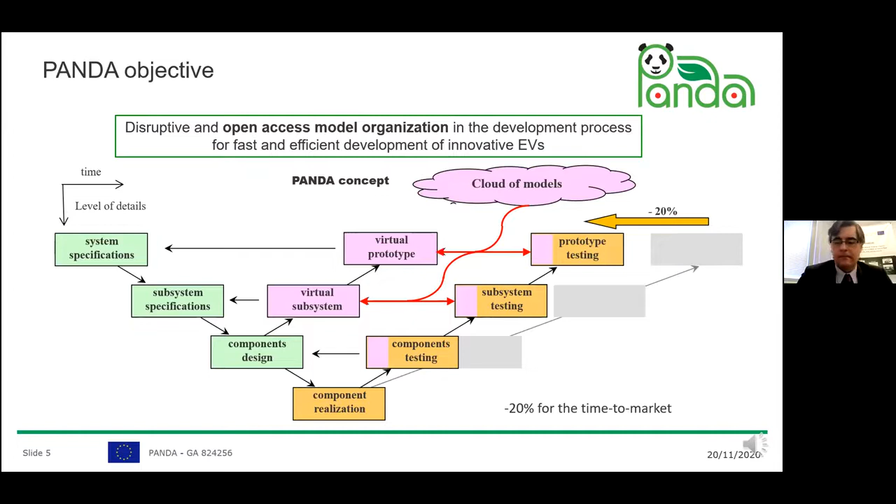What is the difference from other methods? First, we will focus on what is called functional simulation. Most of the actual simulation tools are based on structural description. That means that you have a library of structural components and you connect the components. But in our case, we will use another approach, which is called a functional description, so that we are focused on the function of the component and not the structure. The drawback of this methodology is that the user has to pre-solve some conflict of association before the simulation. But the interest is that with this pre-work, we can achieve a faster simulation and also more flexibility.

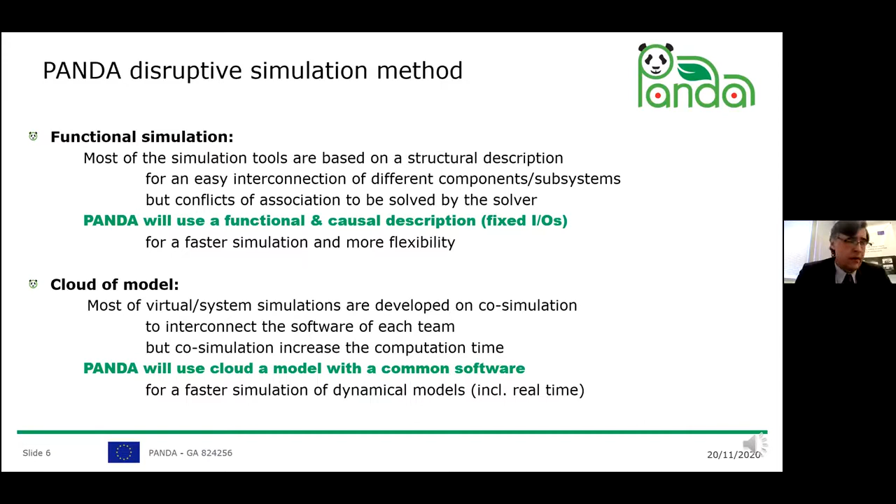The second key point of the PANDA project is to develop a cloud of models. On the contrary of most of the actual ongoing projects, we will not use co-simulation by interconnecting different software. We will use a common software with a cloud of models. The drawback is that each partner should learn the new software and the new method. The interest is that it will increase interoperability and lead to a faster simulation that could be very useful in real-time application.

In order to achieve this goal, first, we will use the EMR formalism developed by University of Lille. It's a formalism to organize models. We will use also an industrial software, Simcenter Amesim from Siemens, in order to demonstrate that this method can be integrated in actual software tools. And we have 3 study cases: a battery electric vehicle from Renault, a fuel cell vehicle from another European project managed by Université de Bourgogne-Franche-Comté, and also a hybrid vehicle from Valeo company.

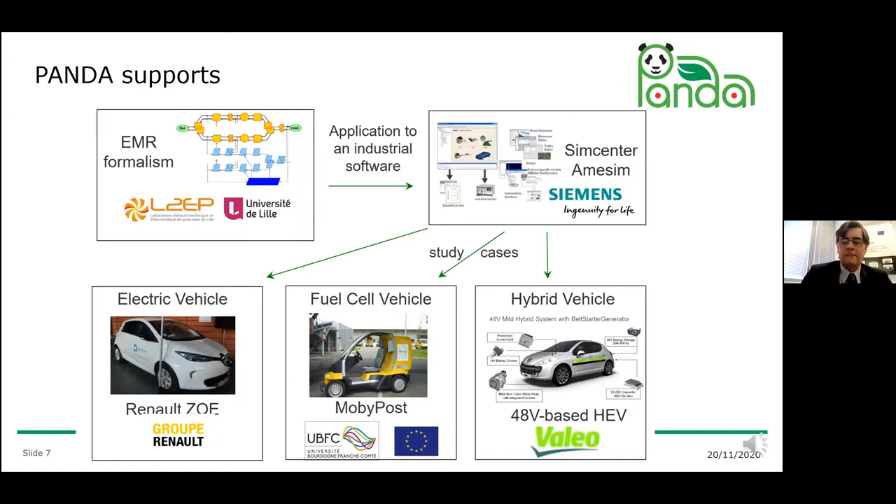So let's focus on simulation library. First, we use as a common organization formalism EMR, energetic macroscopic representation. EMR is a graphical formalism in order to organize, model, and control. It is focused on the exclusive use of integral causality, more related to physical behavior, on interaction principle that respects energy conversion between components. And we have some rules in order to systematically define the control scheme. So the control is in blue in this diagram, and the system is in orange and green. And moreover, we have some rules in order to achieve a model reduction for simplification of models.

So EMR is a causal and functional formalism for control and model organization that leads to fixed input and output of each subsystem. This property is of interest for seamless interconnection of the different components. Because of the integral causality, it will lead to a low computation time in comparison with other software. And another key point is that because the input and output of each block is fixed, that means inside these blocks, you can have different levels of accuracy for the different models.

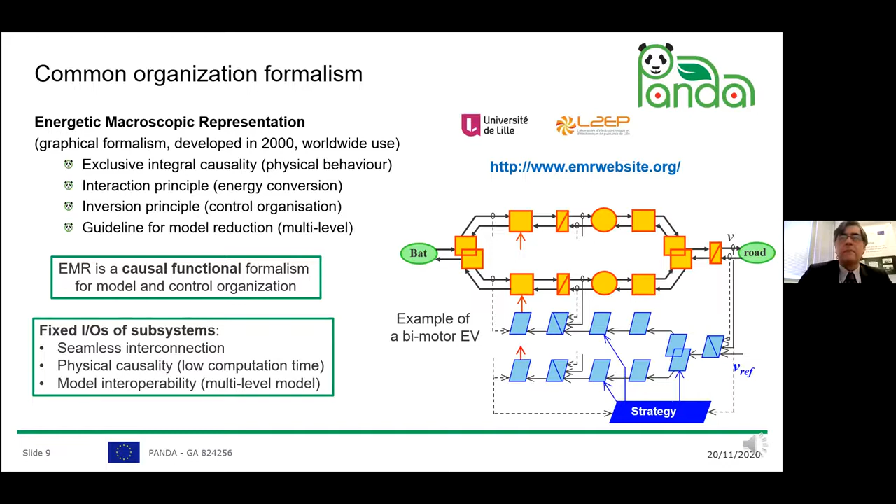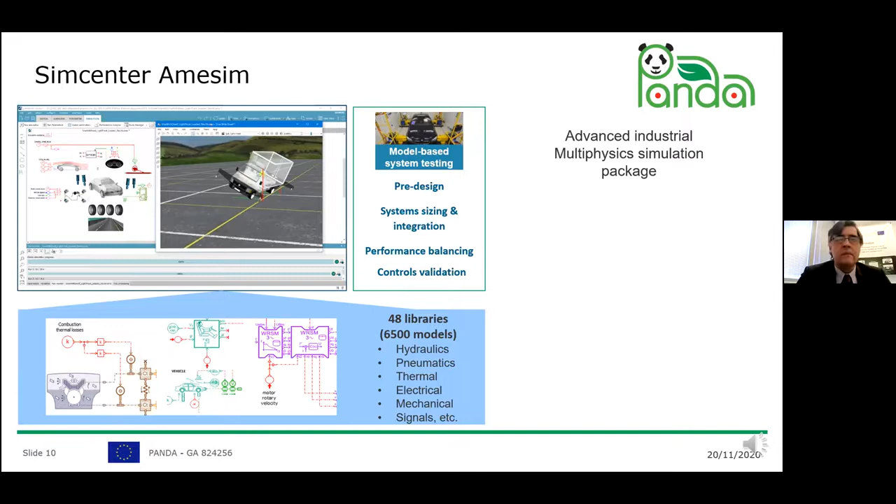So Simcenter Amesim has been chosen by the partner to integrate this method and to show the possibility to integrate this method. It is a well-known advanced industrial tool specifically for the automotive industry. And as most software, it is mainly based on a structural library. That means that you have a library of components and you pick and place a component and connect it as it is in real life, as you can see in this figure.

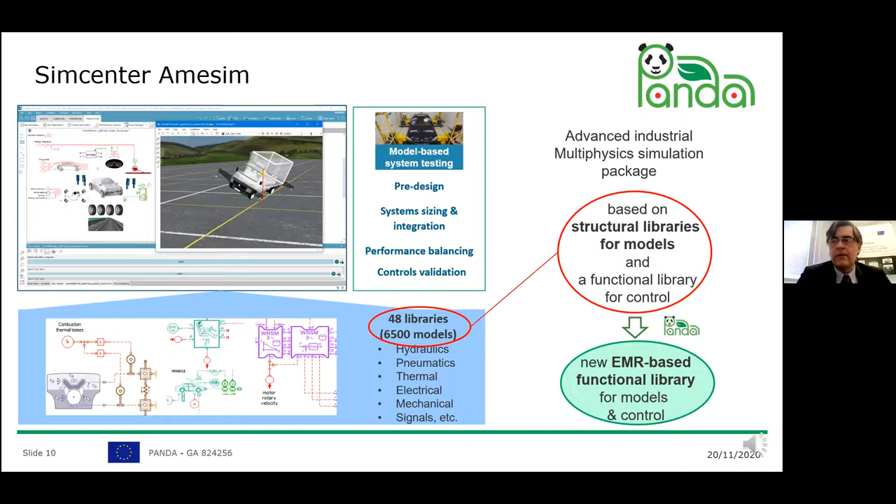But within the perspective of PANDA, we are developing a new library, a functional library, in order to organize, model, and control in the same way based on the EMR philosophy. So we have achieved this new library. You can see the library with the different EMR pictograms that can be used. And we developed some help modules and tutorials in order to help people to achieve that.

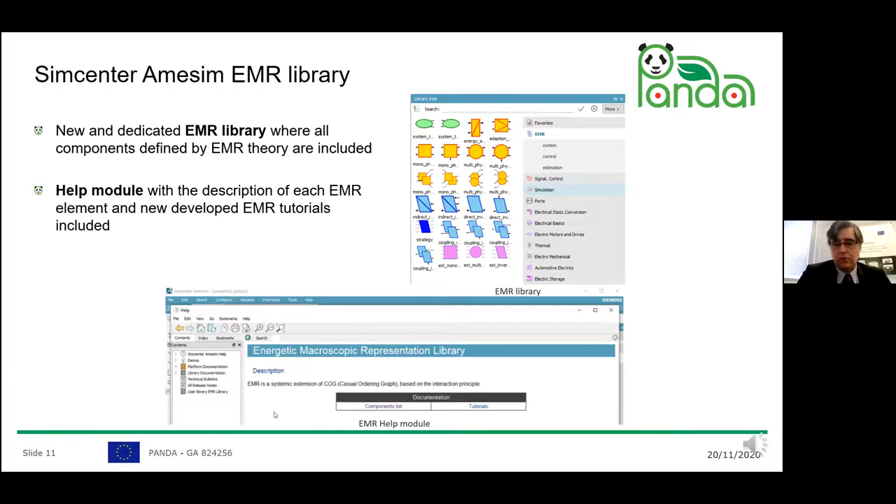So let us take a simple example, a very simple battery electric vehicle. After the modeling part, modeling equations, we should organize all the model according to the EMR rules with fixed inputs and outputs defined by the method, and in a second time, we can systematically organize the control scheme in blue. And then using the EMR library, we can systematically transpose this model organization in the software.

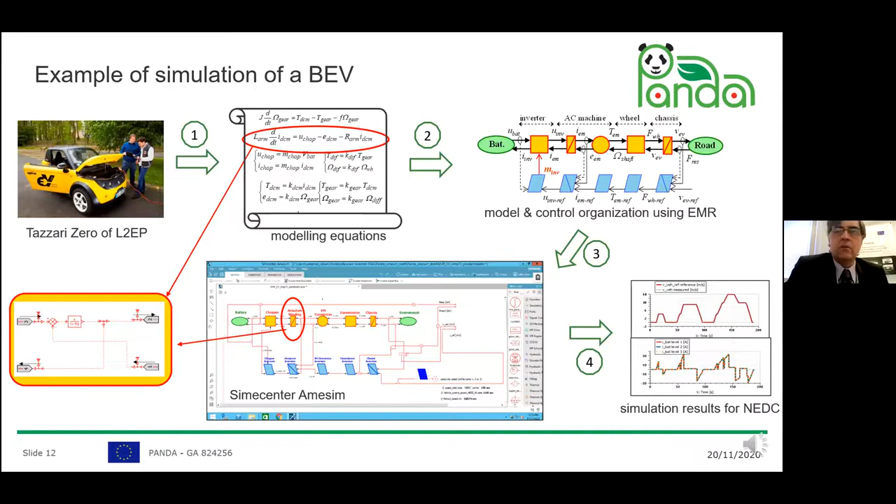And if you look at one component, for example, you can see how we can implement the equation of this component, but always respecting the inputs and outputs defined by the method. And then we can get some simulation results using some driving cycle and look what happens in terms of energy consumption and so on.

What is important in this method is that thanks to the fixed input and output organization, each component or subsystem can have different levels of model. For example, for the battery, we can have a low accuracy model and fast simulation, medium accuracy, high accuracy, and it is the same for other components. That means that we can very easily change the level of model in function of what we would like to study.

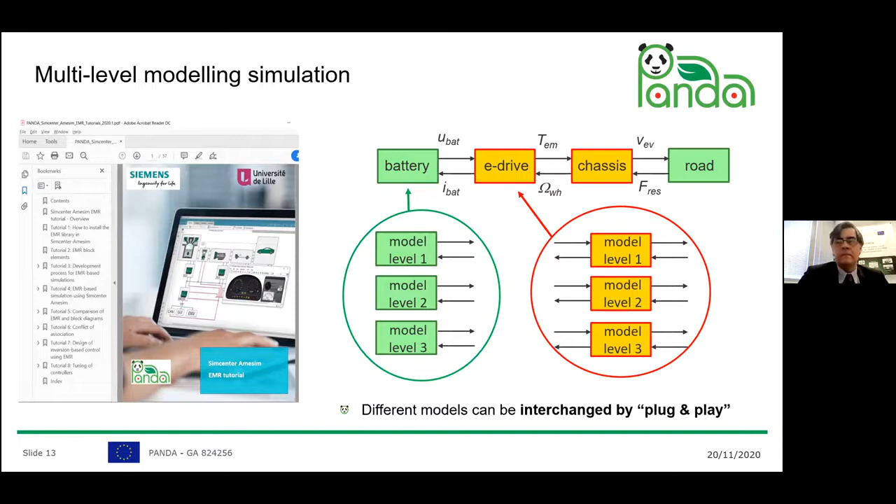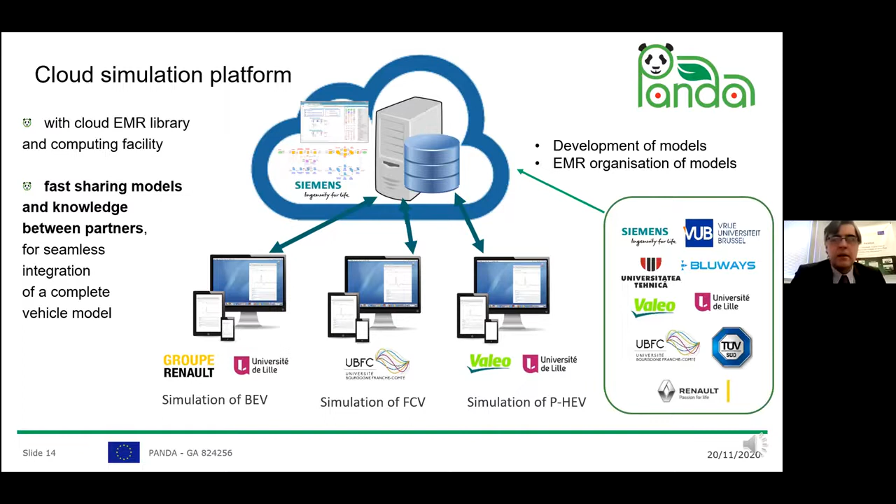All the models have been built by the partners and capitalized in a cloud with this common software. And now we are able to simulate the reference vehicles and of course other kinds of vehicles by using the cloud. So the reference vehicles are battery electric vehicles, fuel cell vehicles, and plug-in hybrid vehicles.

There are two ways to use this cloud of simulation. The first is to upload the simulation file on a local computer and to run and work locally. It's called standalone simulation. The other possibility is that the user is connected to the cloud and builds his model using some pre-models, to run the simulation in the cloud and to upload the results. It is called cloud computing simulation.

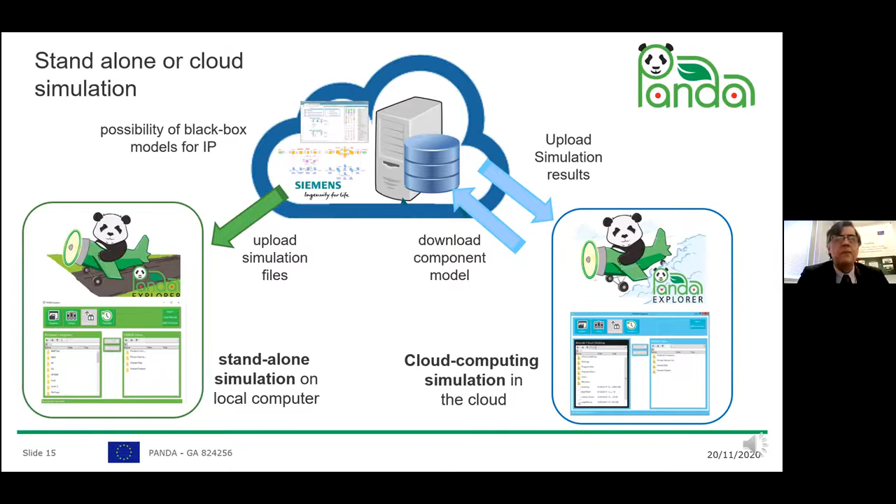What is important to highlight is that some blocks, some elements, could be defined in a black box approach in order to be sure that the people that provide this component can keep the intellectual property. I will now present one example. Of course, we have simulated the three vehicles, but I will focus only on the battery electric vehicle.

So the studied EV is the Renault Zoe from the Renault group. Globally, we can say that we have four main subsystems in interaction in the traction subsystem: the battery, the electrical drive, the chassis, including mechanical transmission, and the road. The Zoe is the one with 41 kilowatt-hours of lithium-ion battery and a permanent magnet synchronous machine of 65 kilowatts. And globally, the vehicle has a fixed gearbox and is more than 1.4 tons.

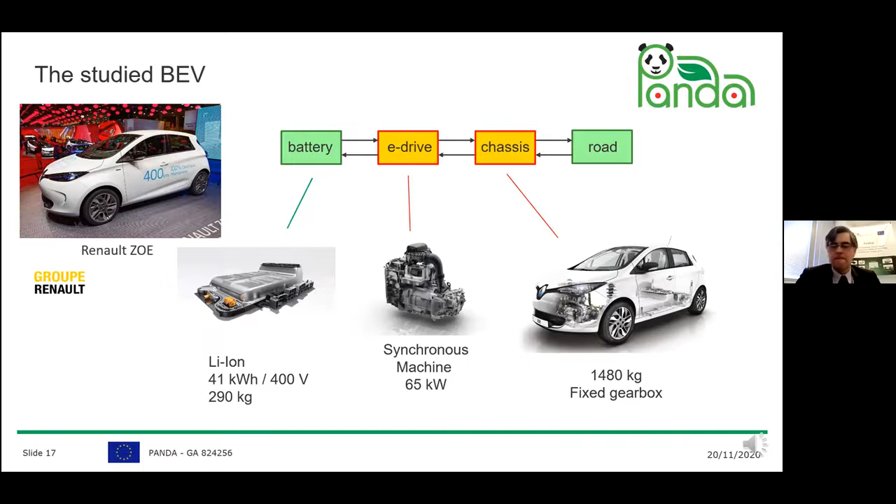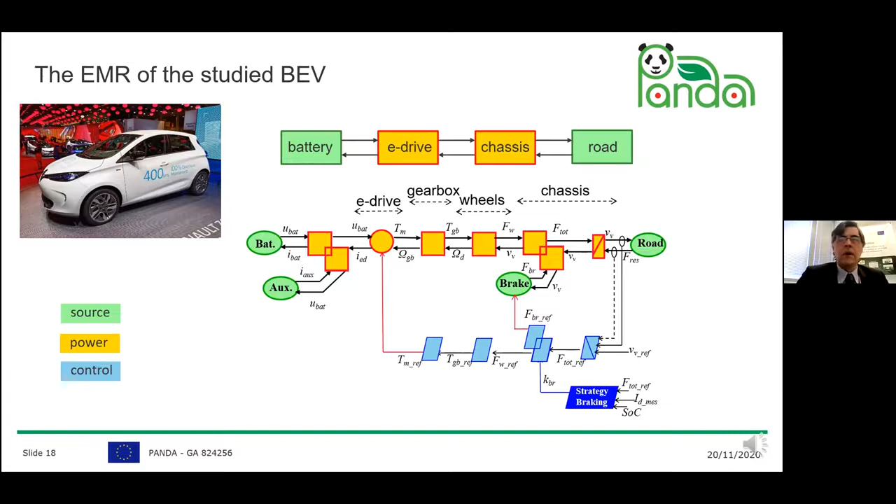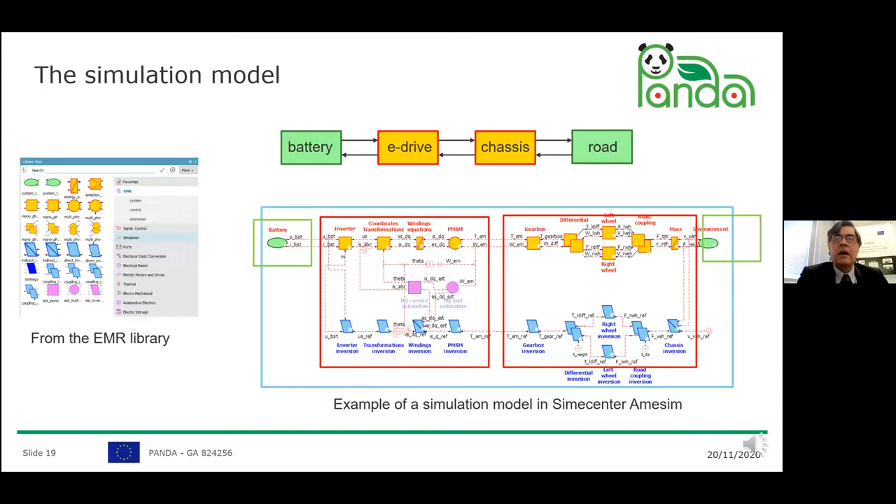So based on this global organization, we can use the EMR library of Simcenter Amesim to pick and place different models. And you can see in this slide that I have selected a more advanced model than in the previous slide for the electrical drive and the chassis.

You can see only two models that have been developed within PANDA. The first one is a very simple efficiency map. It is a static model developed by Groupe Renault. And the second one is a more complex model. It's a dynamical model, including saturation effect of the flux. It has been developed by the University of Cluj-Napoca.

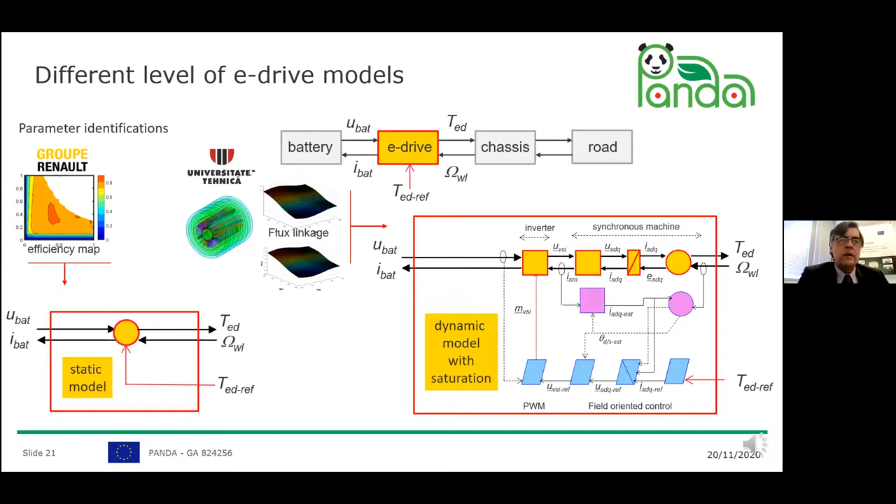And once again, inputs and outputs are exactly the same. In terms of electrical ports, it's battery voltage and current. In terms of mechanical ports, it's torque and rotation speed. And in terms of control input, it's the reference torque. That means that all the models can be interchanged very fast and easily.

Of course, the models have been validated. So Renault did some real driving cycle tests on the track of RTR in Romania. And we use the velocity plots as reference for the simulation. And we compare simulation results and measurements on the real vehicles on different variables. I just present the energy consumption and state of charge of the battery.

And we can see that there are few errors, and for the different driving cycles we test, urban, extra-urban, highway, and so on, we have an error on energy consumption lower than 2%. That demonstrates the fidelity of the simulation.

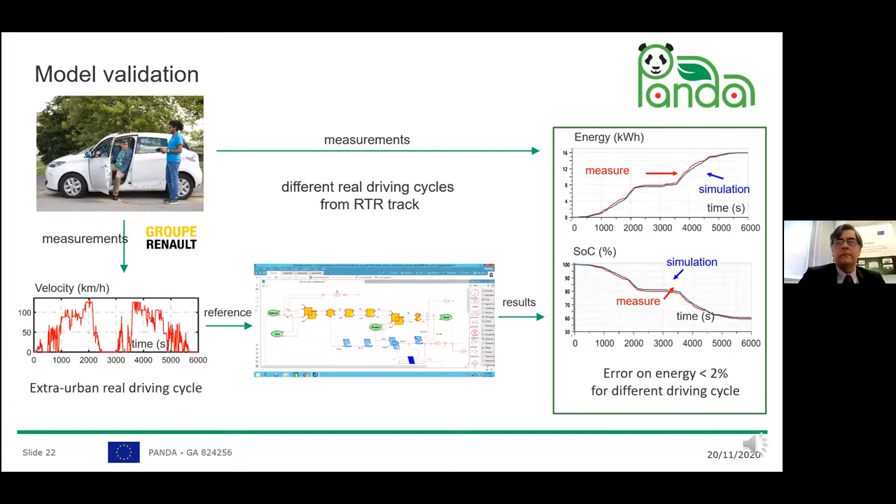Another study which is also of interest is to compare the classical approach with the new one. Thanks to the Simcenter Amesim software that is based on a structural library, we can compare a structural classical representation of the vehicles with the one with EMR. And using the same level of accuracy of each model and using the same control, we have achieved a reduction of the computation time by 15%.

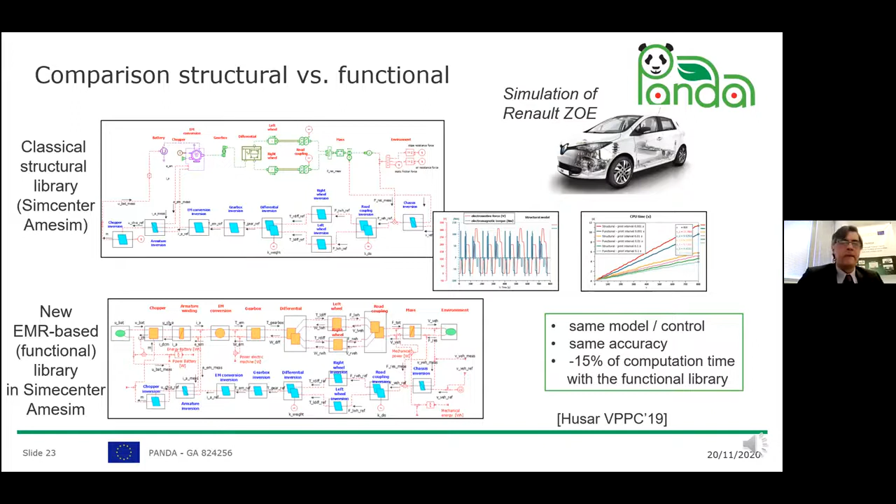So now some perspectives about the future steps. We are working specifically on the demo car of the Valeo company. It is a classical thermal car that is hybridized by adding two electrical machines, one in the rear, one in the front, and a battery and a charger. And the interest of this part of the project is to test the added electrical systems.

So we would like to test the combination of machine and battery by simulating the other parts in real time and interacting between this tested subsystem and the other part of the vehicle, which is called hardware-in-the-loop testing.

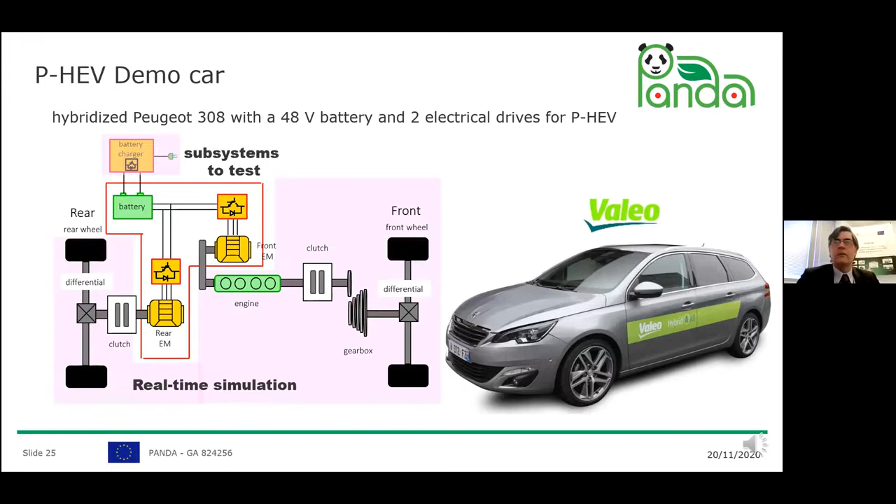To do that, I will just take the example of the battery. So the battery developed by Bluways is interconnected by a power interface and a real-time simulator developed by Typhoon, which is connected to the cloud. There are two ways to do the test. The first is to upload the file from the cloud, the file that simulates the plug-in hybrid electric vehicle, and to run the test locally.

The second way is to split the model of the vehicle to have one part in the local power interface, one part that runs in the cloud, and to have some exchange between the data of both, and to do one part remotely.

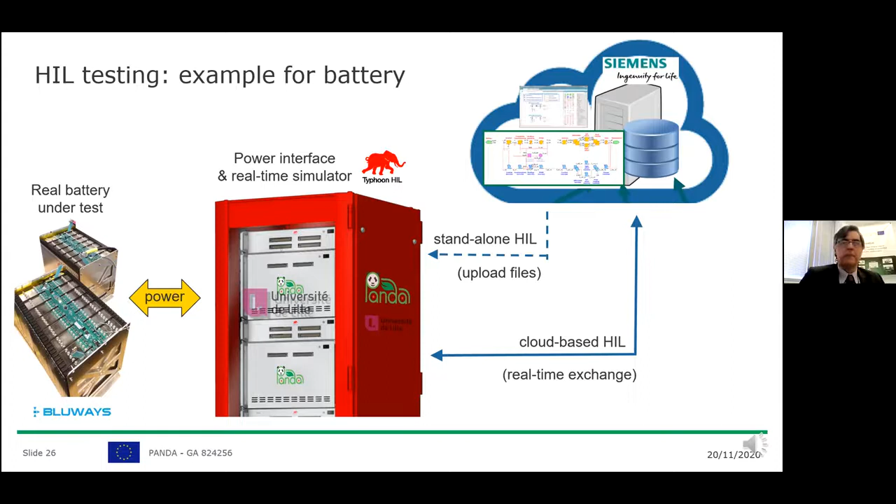So in order to conclude, I would say that we achieved the cloud of models, and we use it in order to simulate the three reference vehicles. Nowadays, we are working on testing, using the hardware-in-the-loop method, the electrical system of the plug-in hybrid electric vehicle. And we have to estimate the time to market reduction that we are able to have using that method.

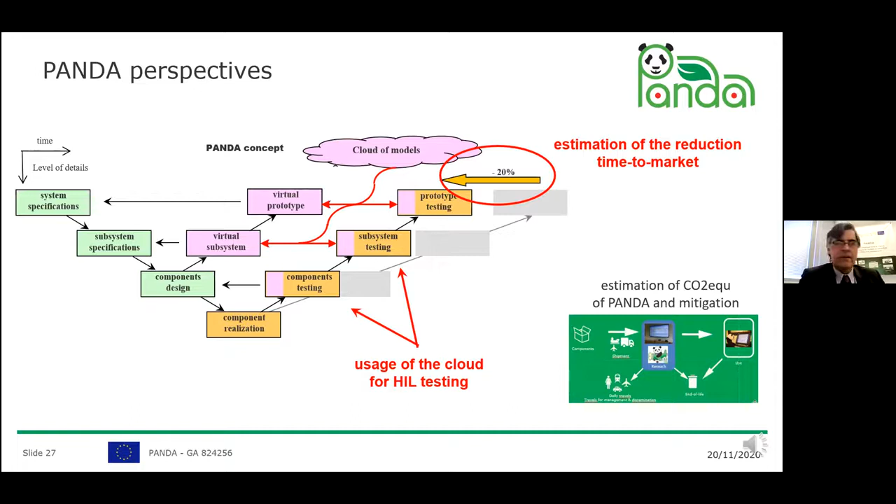And moreover, I will finish by highlighting that we are estimating all the CO2 emissions due to the PANDA project, by the travels, computing, the equipment, and we will achieve some mitigation actions.